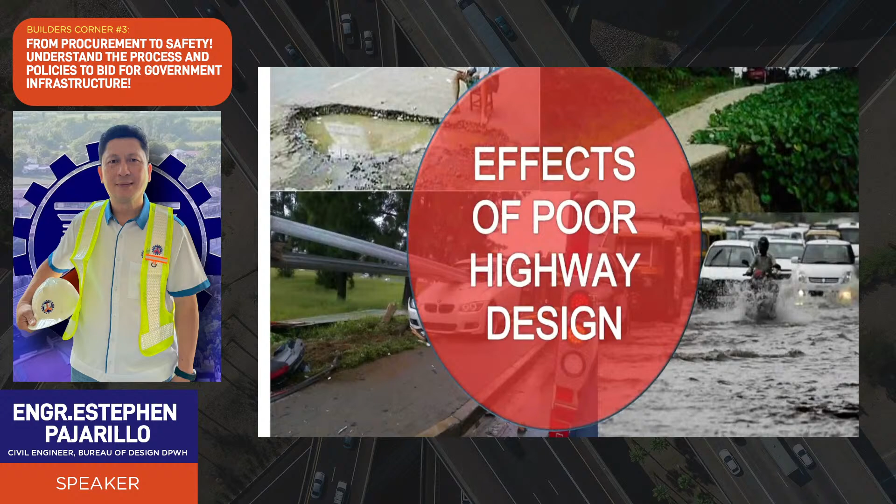These are the effects of poor highway design. When the highway design falls short, the consequences can be severe. Poor pavement design can lead to a shorter road life and increased maintenance costs. Inadequate slope protection can cause landslides or road collapse, especially in our country's varied terrains. Geometric design flaws might result in unsafe driving conditions, while subpar drainage design can lead to waterlogging and structural damage. These pitfalls underscore the need for rigorous design standards and practices.

These are the highway design standards. There are types of highway design standards. To mitigate these issues, we rely on established references and standards. The DPWH Design Guidelines, Criteria, and Standards from 2015 set the local framework. Internationally, we refer to AASHTO's Policy on Geometric Design and their Guide for Pavement Design. Additionally, the Highway Safety Design Standards provide critical directives on road safety and signage. Adhering to these guidelines is vital for constructing highways that are safe, reliable, and sustainable.

Moving on, let's break down the highway into its core components. The components form the building blocks of highway design, and each serves a specific function. Understanding the elements is crucial for grasping the holistic design process that goes into the highways we use every day.

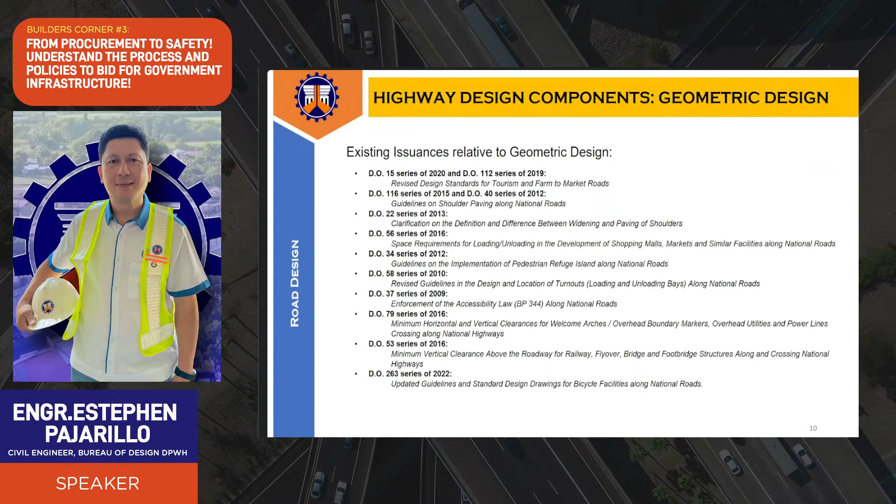Turnouts or loading and unloading bays are given updated guidelines in Department Order 58 series of 2010, reflecting the need for safer and more efficient roadside areas. The enforcement of the accessibility law along national roads is mandated by Department Order 37 series of 2009, ensuring that our roadways are inclusive and accessible to all.

Department Order 79 series of 2016 and Department Order 53 series of 2016 set the minimum clearance for various structures along national highways, from welcome arches to overhead utilities, ensuring the safe passage of vehicles. Lastly, the Department Order 263 series of 2022 updates the guidelines and standard design drawings for bicycle facilities, recognizing the growing need for sustainable and alternative transport options. These issuances reflect the DPWH's commitment to evolving and improving road design to meet the needs of the public and the environment.

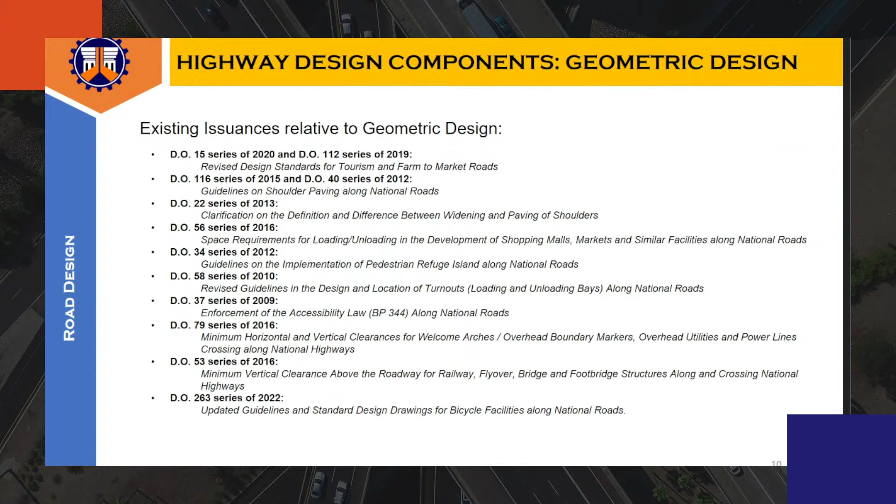The pavement design is a sophisticated process that requires precise calculation and consideration to ensure that the surface can withstand the expected traffic loads while providing a safe and comfortable driving experience. This process entails determining the appropriate thickness and strength of the pavement, whether it's asphalt or concrete, that will lie on the prepared soil foundation, known as the subgrade.

The design of asphalt thickness is guided by the AASHTO empirical equation, taking into account factors like the expected traffic load, measured in terms of equivalent single axle loads or W18, the reliability factor that accounts for variation in traffic prediction and material performance, and the serviceability index, which represents the level of comfort users experience when driving on the pavement.

Drainage coefficient and soil properties also play a crucial role. These ensure that the pavement can properly drain water and rest on a stable foundation, respectively. A structural number is an abstract figure representing the collective strength of the pavement layers, tailored to the environment it is built in.

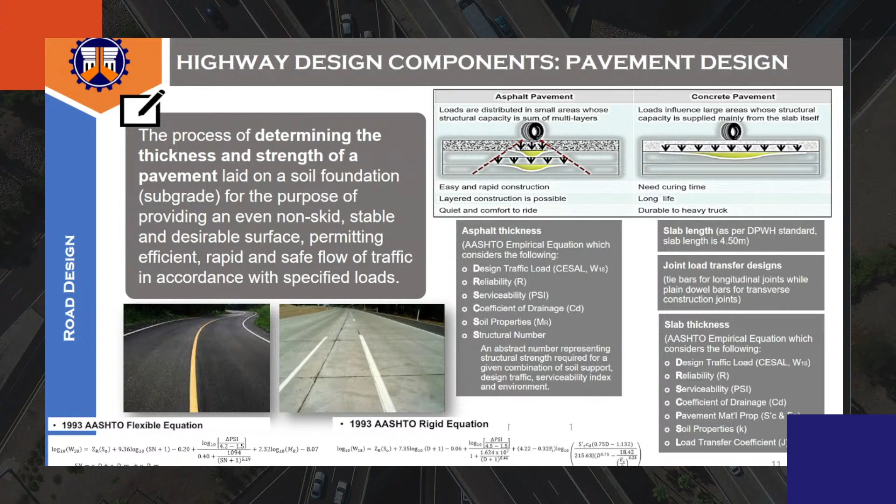The design and construction of pavement is governed by a set of guidelines and standards to ensure quality and consistency. The Department of Public Works and Highways has issued several directives in this regard. Department Order 32, Series of 2016, and the corresponding memorandum detail the guidelines for the use of dowel bars in Portland cement concrete pavements, an essential component for load transfer and preventing uneven settlement and cracking.

To set the benchmark for arterial and secondary national roads, including access to ports, we refer to Department Order 40, Series of 2014, and Department Order 22, Series of 2011. These orders prescribe the minimum design standard for Portland cement concrete pavement. Department Order 54, Series of 2012, provides guidelines on the reblocking of existing concrete pavements. This is a critical maintenance activity to restore the surface quality and prolong the pavement's life.

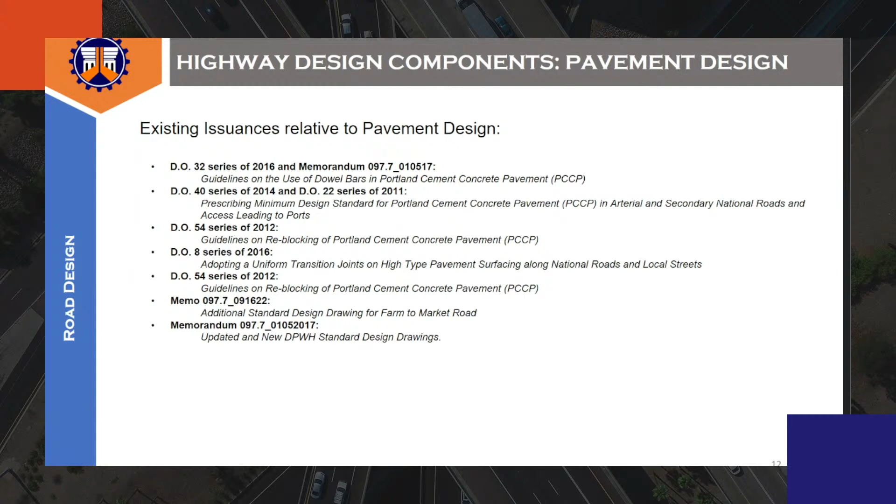An integral part of highway design is ensuring proper drainage. The primary objective is to maintain all parts of the highway in excellent drainage condition, preventing traffic congestion and accidents that can be caused by flooding water on the road surface. Hydrologic analysis begins with the determination of design runoff, for which we use the rational method. This method calculates the design discharge Q using the formula Q = 0.278 CIA, where A stands for drainage area in square kilometers, C is the runoff coefficient and I represents rainfall intensity. These factors together determine the volume of water that must be accounted for in the design.

Moving on, hydraulic analysis is about translating the hydrologic data into physical infrastructure. We take the calculated design discharge and consider the length, slope, and type of the culvert, as well as the allowable headwater depth. The material, cross-sectional shape, and entrance type of the culvert are also crucial inputs. From this, we can determine the size of the culvert required to ensure proper drainage. These steps ensure that the highway remains passable and safe under various weather conditions, protecting the investment in infrastructure and the safety of the public.

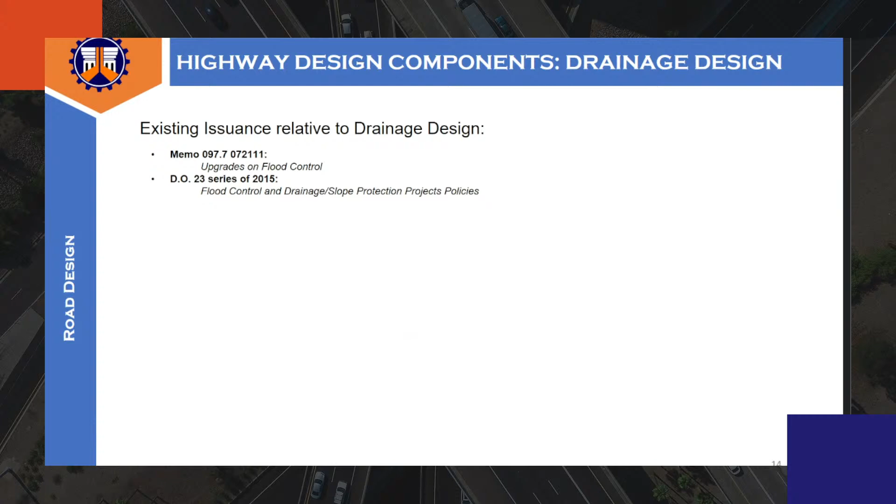Now, let's turn our attention to slope protection. Within highway design components, slope protection is crucial for the safety and longevity of highway infrastructure, particularly in regions with challenging topographies. The first step in designing effective slope protection is establishing rigorous design criteria and principles. Grounded in scientific engineering methodologies, it begins with identifying potential failure mechanisms that may affect the slope, which involves analyzing past records or experience in the area.

To ensure a stable slope, two criteria must be met: slope stability and slope protection. Stability involves ensuring that the slope can support itself and the loads imposed upon it without failing. Protection involves safeguarding the slope against surface erosion and weathering, which can weaken the structure over time.

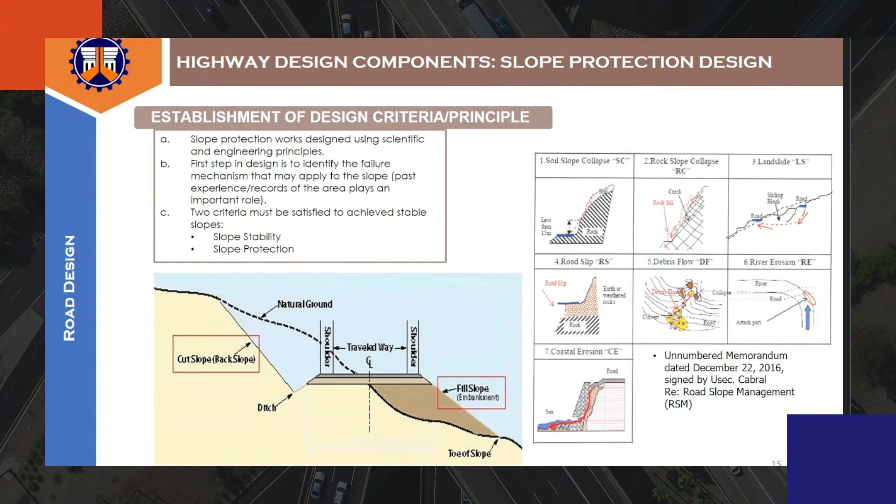An unnumbered memorandum dated December 22, 2016, signed by Undersecretary Cabral, particularly addressed road slope management. This memorandum provides guidance on maintaining and managing road slopes to prevent failures and ensure the safety of the traveling public. Effective slope protection design combines thorough assessment, proper material selection, and engineering practices to mitigate potential slope failures, such as soil slope collapse, rock fall, landslide, road slip, debris flow, river erosion, and coastal erosion, as illustrated in the image provided.

Continuing from our previous discussion of slope protection design, a pivotal aspect is the slope stability analysis. The analysis is performed to determine whether a man-made or natural slope or a slope protection structure can withstand potential sliding or collapsing.

To quantitatively assess slope stability, we introduce a factor of safety. This numerical value provides a measure of how safe the slope is from failure. The higher the FS is, the less likely the slope is to fail. For a slope to be considered stable, it must meet minimum FS criteria against different types of failure modes.

For overturning, the FS should be equal to or greater than 2.0. Against sliding, an FS of 1.5 or more is required. Regarding bearing capacity, which concerns the ability of the ground to support the loads, the FS should be 3.0 or above.

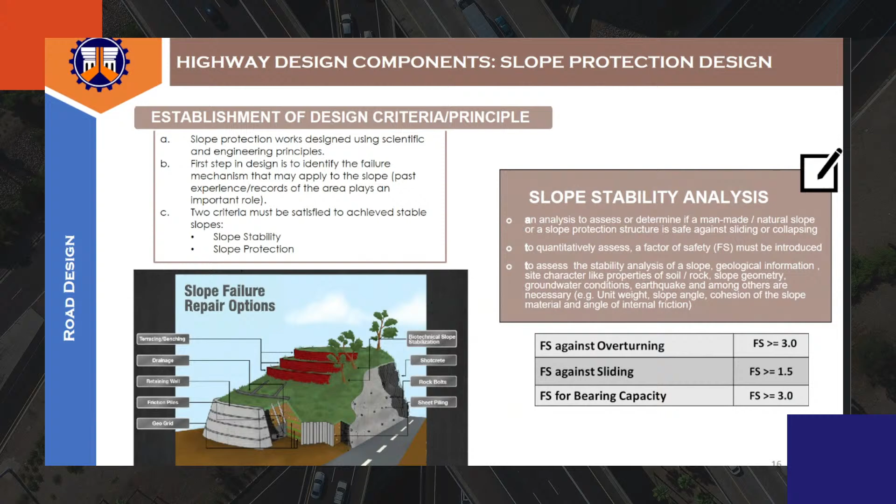This thorough analysis ensures that any slope along our highways can withstand the forces of nature and usage, thereby protecting the infrastructure and ensuring the safety of the public. The design and implementation of slope protection works are critical for the safety and maintenance of our highways. To guide these efforts, several issuances have been established.

The Department Order 68 series of 2012 provides guidelines on the design of slope protection works. This document outlines the standards and methodologies to be used in the stabilization of slopes adjacent to roads and highways, ensuring they are robust and resilient. Further support is found in Memorandum 097.7, which offers updated and new DPWH standard design drawings. These drawings serve as a blueprint for engineers and contractors, detailing technical specifications for various types of slope protection structures.

Recently, a series of department orders, including Department Order 78 of 2022, Department Order 22 of 2022, Department Order 32 of 2019, and Department Order 25 of 2023 have been issued concerning Item 522, which deals with active and passive systems for unstable slopes. These systems are designed to proactively prevent slope failure and reactively mitigate the impact should a failure occur.

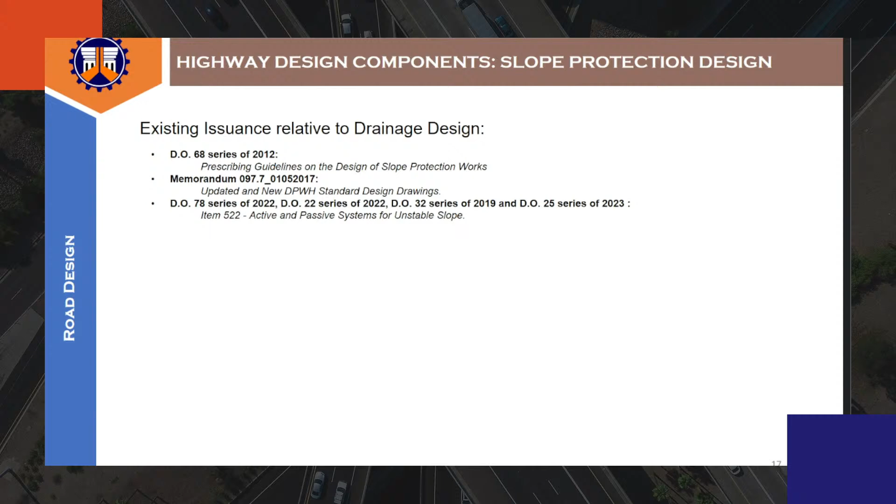Together, these form a comprehensive framework for the management and stabilization of slopes, ensuring the integrity of our road network and the safety of its users. Thank you.

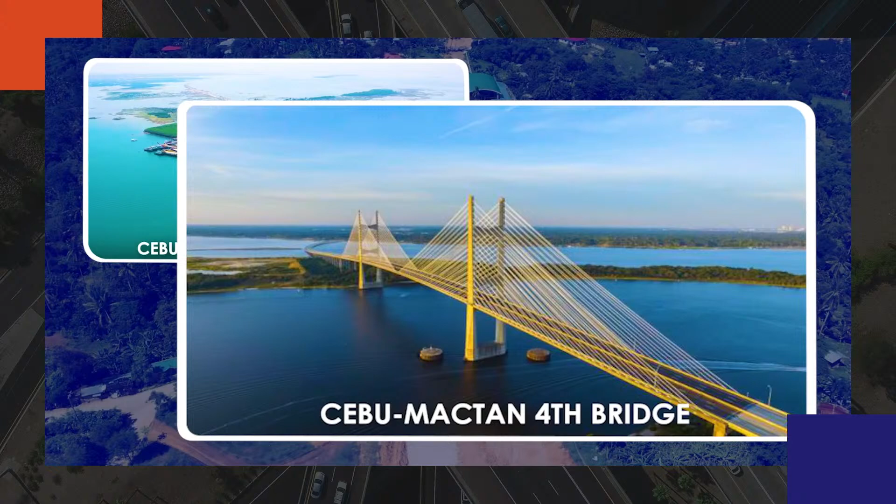Spanning 56.3 kilometers, the Metro Cebu Expressway connects Naga City to Danao City. It consists of 20 bridges, 16 tunnels, and 5 interchanges, traversing along the slopes of the mountain range of Cebu Province, providing a scenic sense while on the road. Once open to traffic, travel time from Naga City to Danao City will be reduced from 3 hours to only 1 hour and 30 minutes, providing transport mobility across urban districts that contributes to redirecting urban land use, demographic, and economic expansion. The project, complementing other development projects such as the ongoing Cebu-Cordova Link Expressway and the planned Cebu-Mactan 4th Bridge, can also provide better accessibility to Cebu's tourist destinations. Metro Cebu Expressway, truly a game changer.

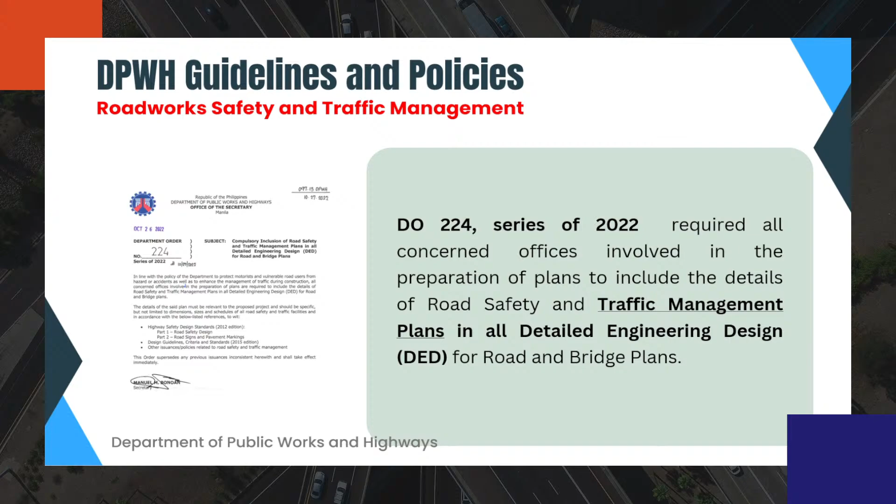Now, although yung policy natin started or was issued last 2022, way back during the 1970s pa po, meron na tayong mga requirements when it comes to roadwork safety. Now, highlight ko lang po that the DPWH requires through the issuance of the DO 224 series of 2022 na lahat po ng implementing offices namin that are involved in the preparation of the plans will include details of road safety and traffic management plans in all our detailed engineering design plans.

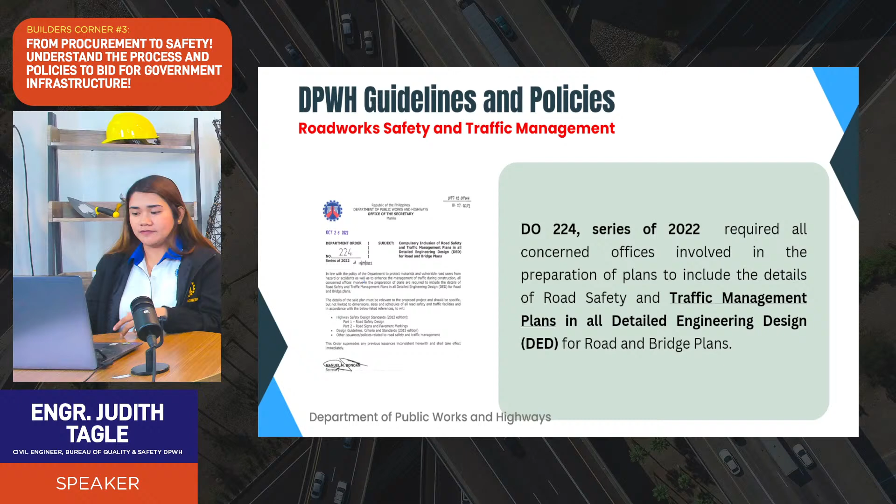So, ibig sabihin po, lahat ng mga DED plans natin, particularly the road and bridges na mga projects po natin, will have a component when it comes to traffic management and roadwork safety. We call that the traffic management plan. So to give you an overview, the traffic management plan is a plan that is being prepared kasama po ng detailed engineering design plan natin.

So in advance of the project implementation. So, during the planning and designing stage, kasama na po siya sa pine-prepare. Now, for now, ang nagpe-prepare nito is si DPWH Implementing Office, and the traffic management plan will form part of the detailed engineering design plan of the project.

Which will be used during the procurement na po. So it covers the design, the implementation, as well as the maintenance during nung ating project implementation to ensure roadworks safety.

Now, in the DPWH, we have our primary or official source or reference for the preparation of traffic management plan. So we have the DPWH Roadworks Safety Manual. Ang current natin ngayon is the 2004 edition, but this year we will be releasing the revised or the updated DPWH Roadworks Safety Manual.

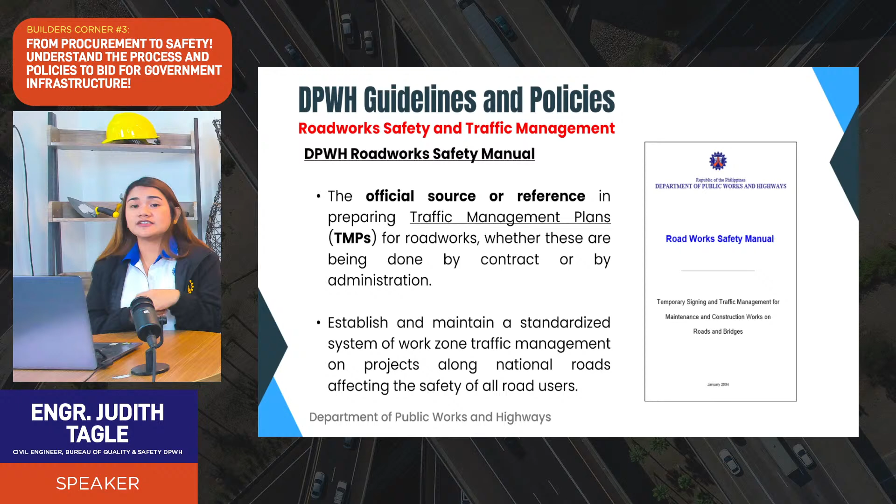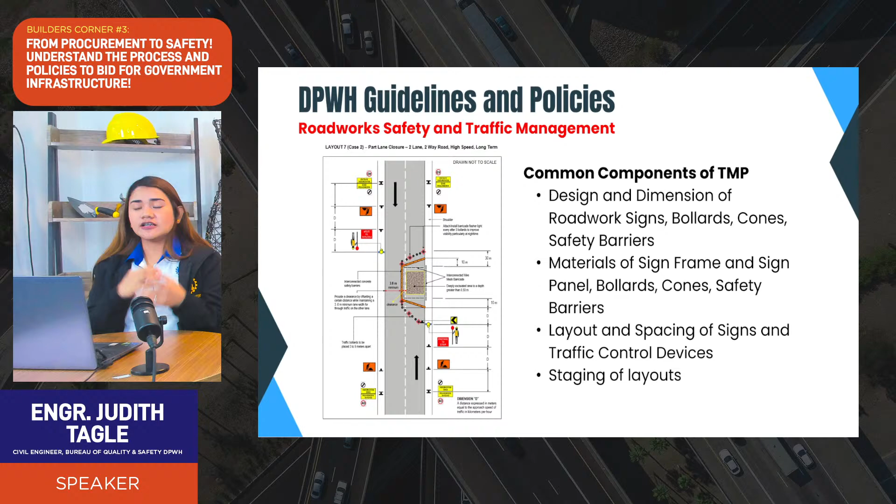Now, dito rin sa TMP, kasama kung ano yung particular na requirement ng DPWH when it comes to the sign, the frame, and as well as the materials for the bollards, the cones, and the safety barriers. Dito rin makikita natin how these signs and traffic control devices will be laid out on site. So sample natin dito sa left side. This is a typical layout of the different traffic control signs and devices na ginagamit po natin sa DPWH.

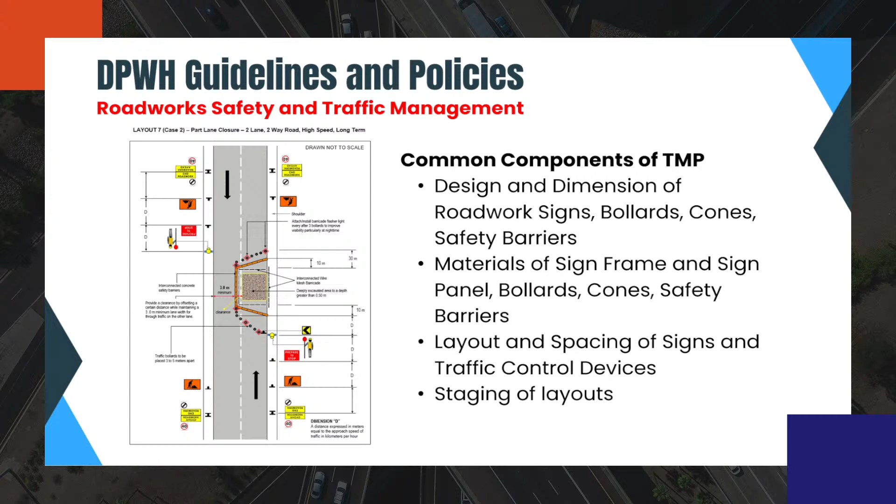So, nakalagay din po dyan what are the required spacing. So, it can be varying depending on the project. So, mag-iiba-iba yung mga spacing natin. So, all of this are included in the TMP or the traffic management plan. So, pwede rin na yung TMP will have different layouts. So, it will depend on the construction methodology and the staging of the project natin, particularly for roads and bridges.

Now, to highlight, kasi sabi natin kanina, we are standardizing our requirements, particularly for the roadwork signs and the traffic control devices na ginagamit natin or dapat na gamitin sa mga DPWH projects natin. So here we are highlighting the typical roadwork signs na dapat na ilalagay or makikita natin sa mga DPWH projects. So we are hoping na some of this talagang nakikita nyo na. Particularly kasi yung color ng roadwork signs natin, yung background niya is yellow. So internationally, we use the yellow background ng mga signs natin to indicate na meron tayong ongoing or temporary roadworks or road construction.

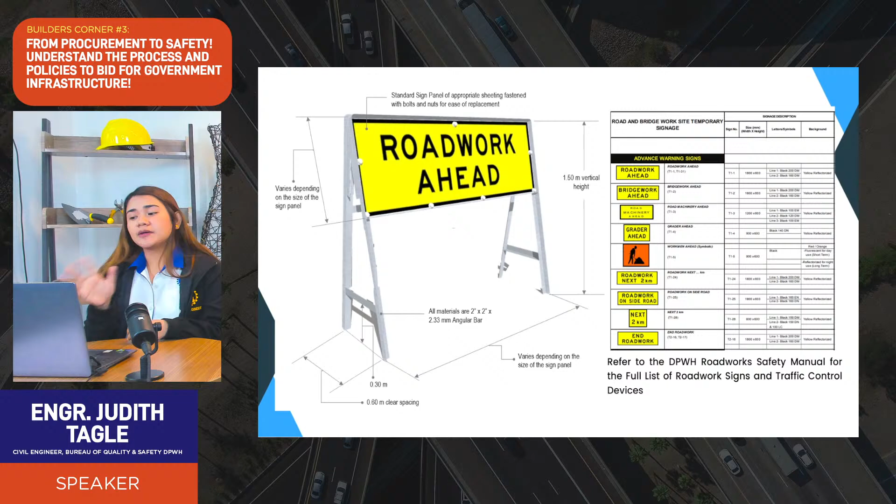Now, pinapakita lang din natin dito what are our requirements when it comes to the sign panel, the dimension as well as the sign frame. Now, on the right side, you will be seeing the different types of signs na meron po tayo doon sa ating manual. Now, these are just some of the signs, marami po yan. So, we just have to refer to the DPWH Roadworks Safety Manual for the full list. Now, etong mga signs po na to, when the TMP is being prepared, kasama na po siya sa Detailed Engineering Design Plan.

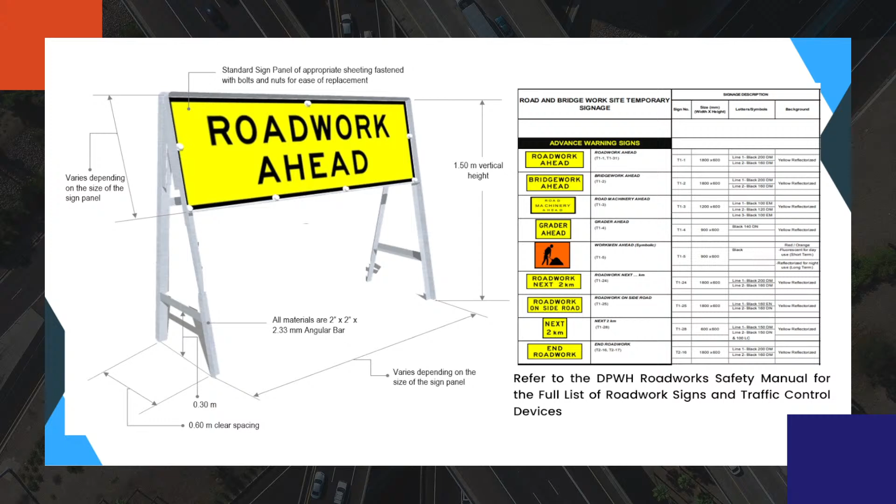Is the requirement when it comes to the sign itself. Now, we are requiring na yung sign panel is made of retroreflective material. So, it is a mandatory requirement for roadwork signs. We are requiring yung ganitong retroreflective material sa mga signs natin because ito yung nag-enable sa lahat ng mga signs natin na makita ng mga road users, ng mga drivers at night.

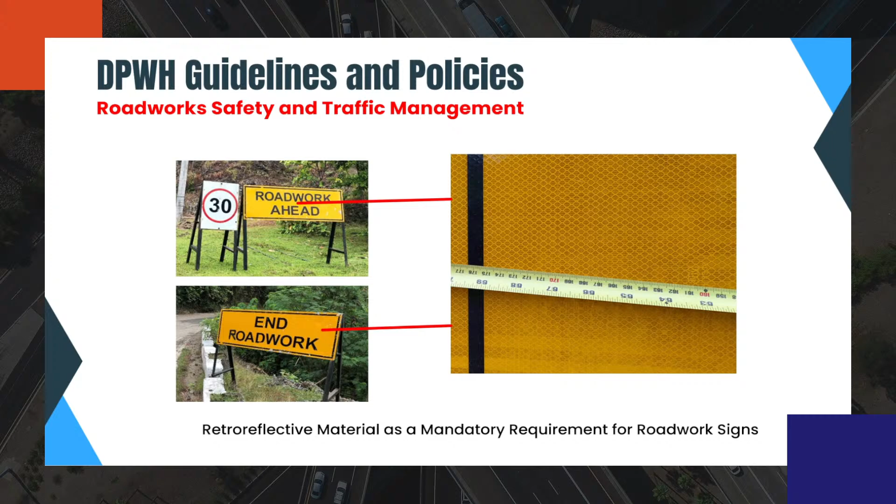So, yung mechanism ng mga signs natin para makita sila at night, na yun yung pinakamahalagang time na nabibigay nung sign yung gamit niya as advanced information dun sa presence nung ongoing project natin, this is through the retroreflective material of the sign itself.

Okay. So, these are also naman our requirement in terms of the traffic control devices. So, our common traffic control devices na we use sa mga projects natin is yung ating temporary bollards, as well as our traffic cones. So, ang main use nila is for delineation. So, ang pinaka-importanteng part will be the retroreflective strips. Yan. So, makikita natin yung mga white na strips dito sa ating screen.

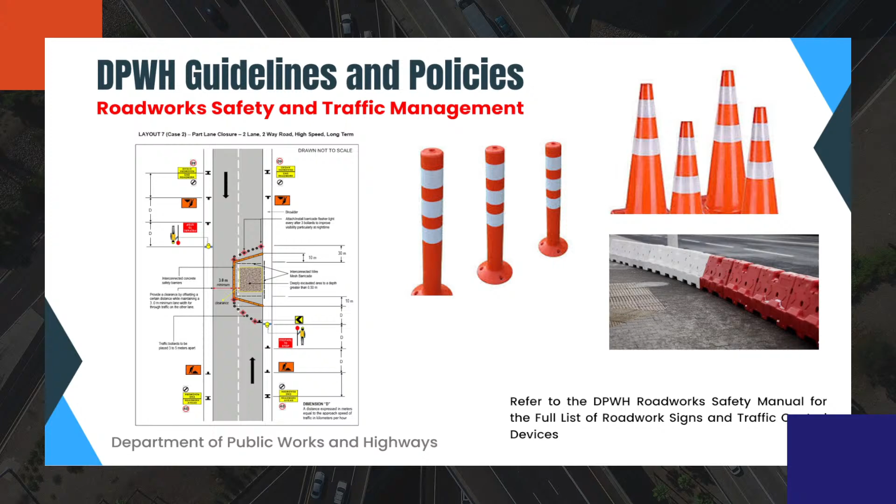So, just like our traffic control signs and roadwork signs earlier, these white reflective strips enable road users to see the alignment of our ongoing project, delineating the project so drivers, especially at night, can see how far the part of the road with the project extends. We also use safety barriers to fully enclose our sites.

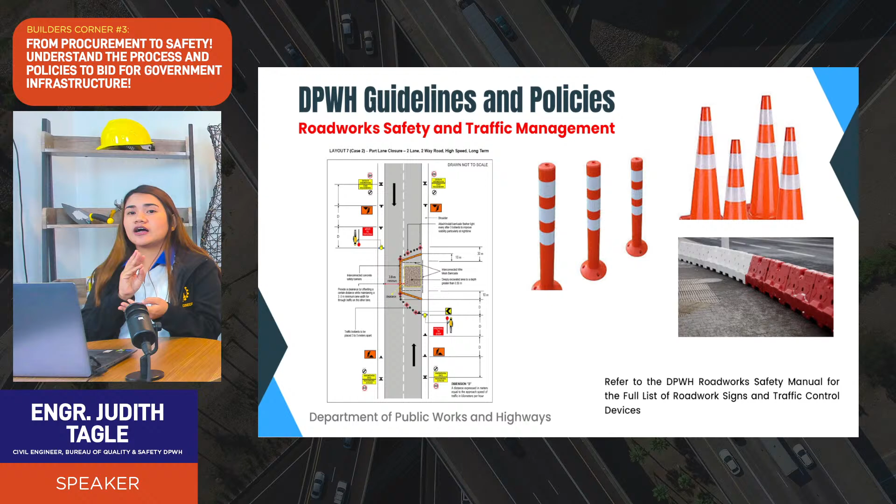These prevent our drivers, in the event of a crash, from entering where work is being done. Now, DO13 of the DPWH series of 2018 requires it to be included in the contract. Since it's in the plan, the roadwork safety and traffic management plan is part of the DED. In terms of the pay item in the contract, it is tagged under item B.8.

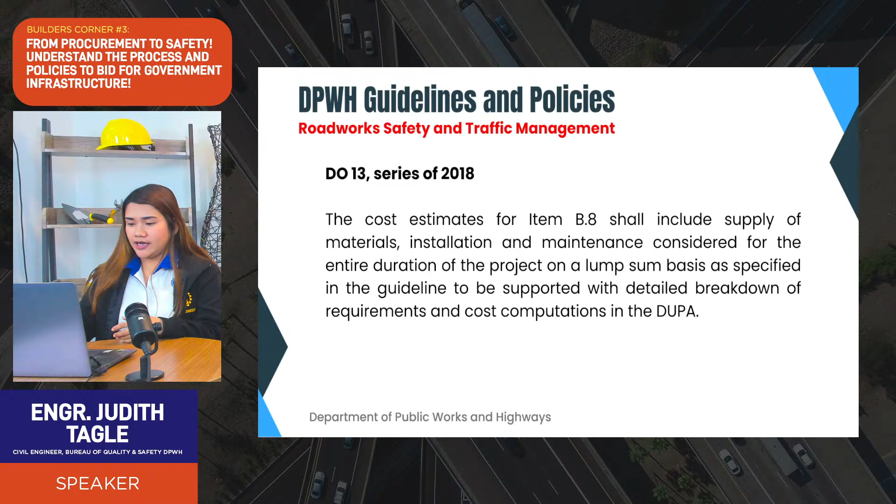If you're familiar with the DPWH pay items, item B.8 includes the supply of materials, the installation, as well as the maintenance during the entire duration of the project. The TMP lists our requirements, and its cost will be paid under item B.8. These are the procedures on how we derive the cost for item B.8. We highlight that item B.8 is on a lump sum basis.

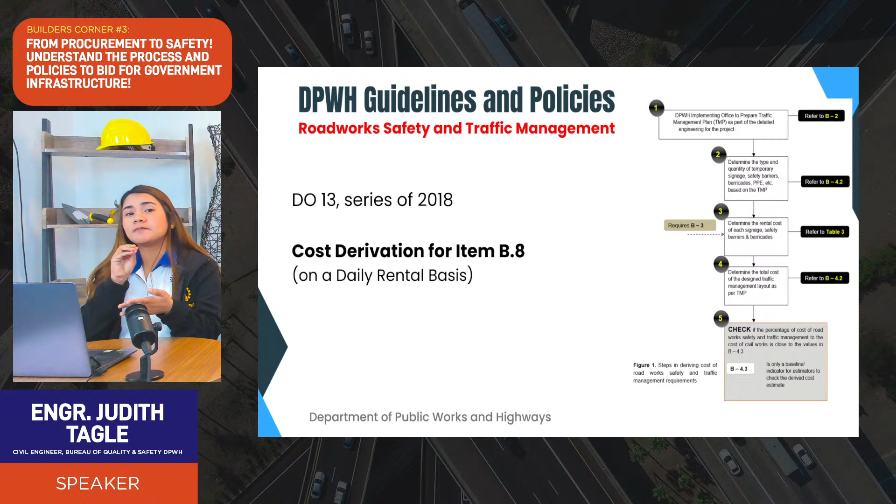When we say rental, the contractor doesn't need to hand over the signs and traffic control devices to DPWH. DPWH only rents them from the contractor, who still owns all the signs and traffic control devices. What we highlight here is that, as required by DO13, the derivation of cost for item B.8 in the contract will come from the approved traffic management plan.

Now, from pre-procurement to construction, these are the requirements. I've already discussed the pre-procurement requirement, the TMP prepared as part of the DED plan through DO 224. During procurement, based on the approved TMP, the contractor submits a bid for item B.8. This forms part of the bid and eventually the contract for the winning bidder, under DO13 series of 2018.

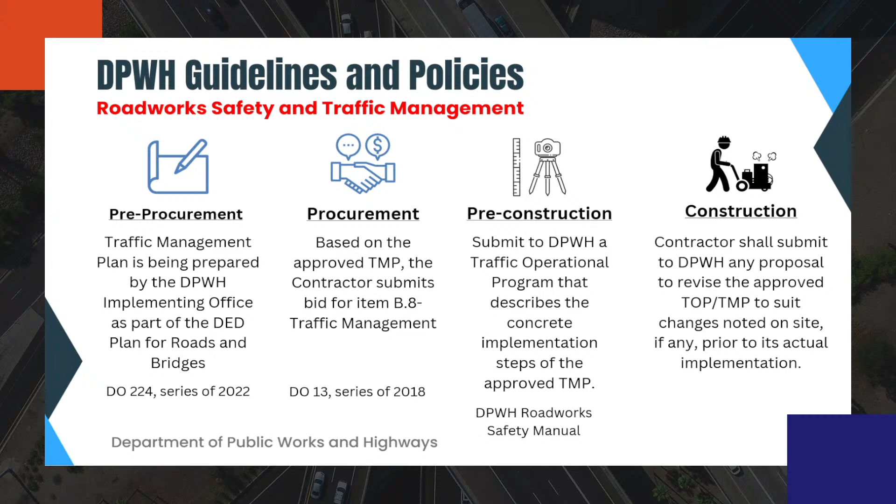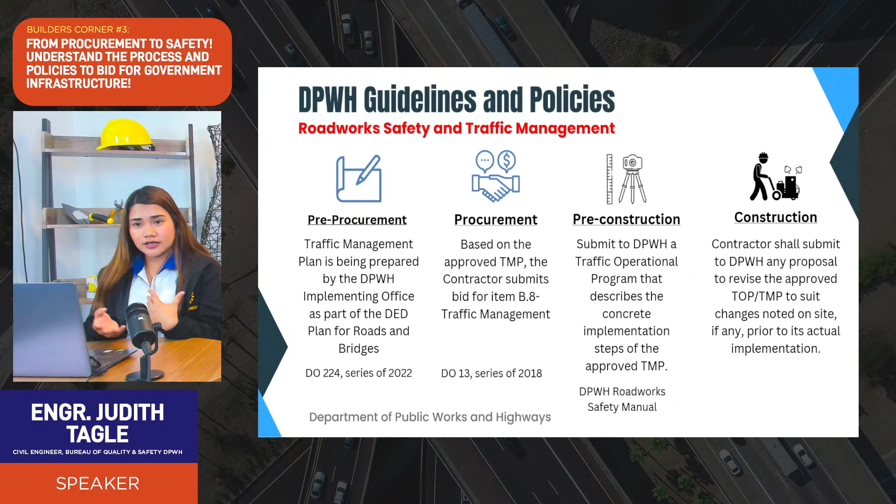During pre-construction, the contractor is required to submit. There will be instances where the prepared TMP is not the same TMP implemented by the contractor, so the contractor may submit their own TMP, called the Traffic Operational Program. It describes the concrete implementation steps of the approved TMP. Any revisions to the TMP by the contractor undergo review and approval by the DPWH Implementing Office.

During implementation, the TMP is part of the DED and of the contract under item B.8. Since it's part of the contract, the contractor must implement what is in the approved TMP or Traffic Operational Program. On our part, the DPWH field engineers, project engineers and inspectors, and the assigned implementing office will ensure the contractor is complying, as well as with the contract agreement or item B.8.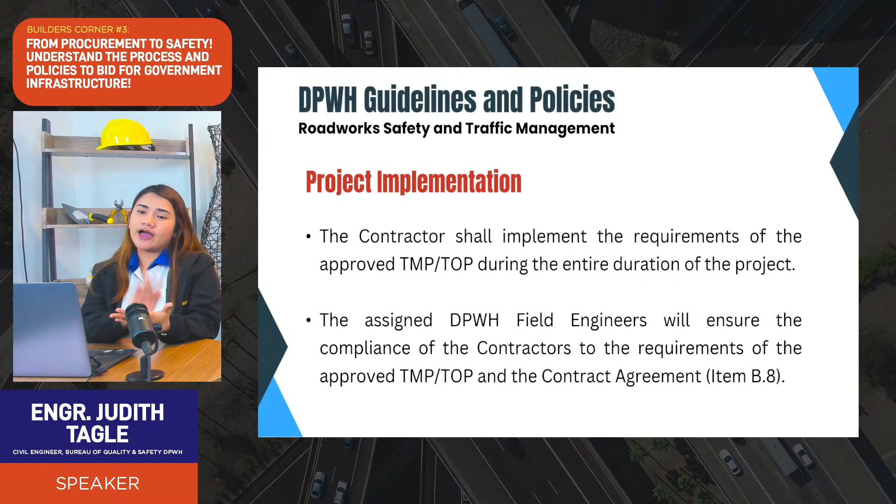So the highlight here is that, as a main document implemented during construction, we have the traffic management plan, and it is part of the contract under item B.8. The contractor will have to implement the requirements of the TMP and the contract to ensure a safe experience for our road users.

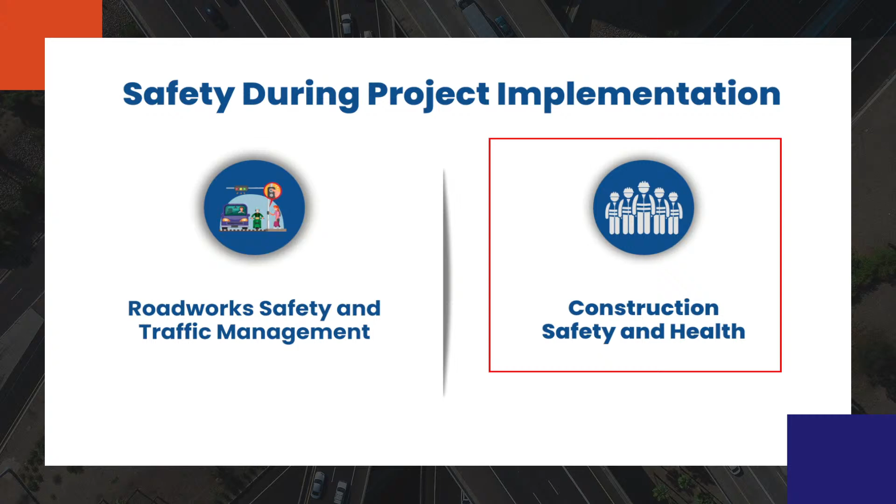The second safety aspect we look at during project implementation is construction safety and health. This is the mother safety policy of the department, from which roadwork safety and traffic management emanated. It is a requirement of the labor code, whose main focus is the safety of the workers doing the work. Under DPWH DO 56 series of 2005, all minimum construction safety and health requirements must be prepared during the detailed engineering stage.

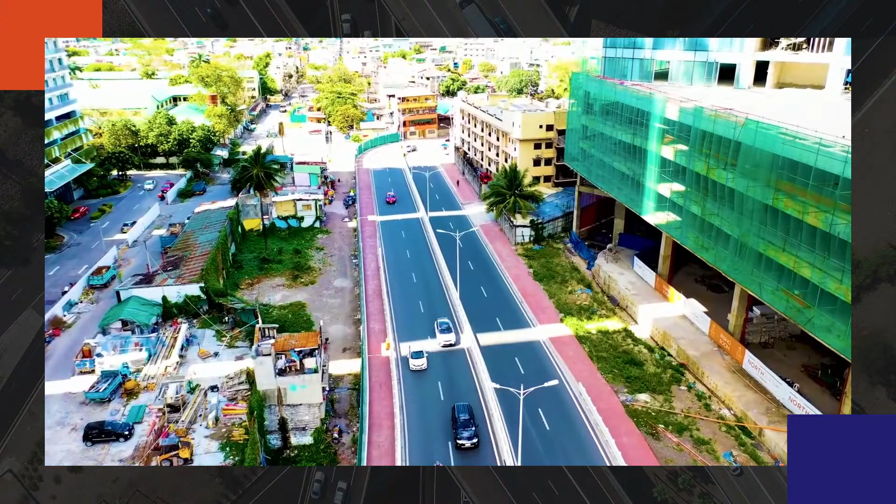For me, the bridge is great, beautiful, and it's easy, more easy access to go to Rockwell, like for grocery shopping or others. So whereas we benefit, and I love it, we could even benefit even more.

Located in central Visayas, the heart of the Philippines with fast-growing economy. More exemplary improvements await the historic province of Cebu with the Metro Cebu Expressway. With its construction started in July of 2018, the Metro Cebu Expressway is designed to improve and enhance Cebu's transport demand. With the project's third segment in the works, made possible through a startup fund approved for the DPWH Region 7, the expressway is expected to act as a north to south backbone highway, allowing a much-needed seamless flow of traffic that will significantly address the congestion in Cebu.

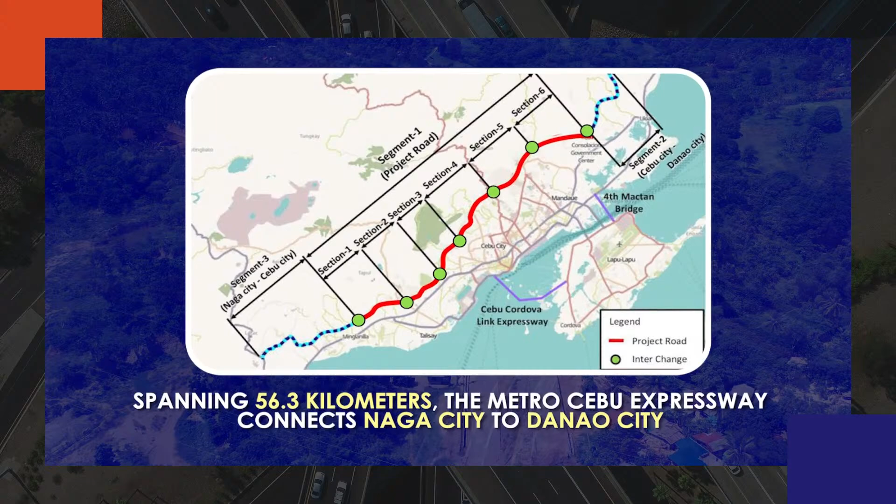Spanning 56.3 kilometers, the Metro Cebu Expressway connects Naga City to Danao City. It consists of 20 bridges, 16 tunnels, and 5 interchanges, traversing along the slopes of the mountain range of Cebu Province, providing a scenic sense while on the road. Once open to traffic, travel time from Naga City to Danao City will be reduced from 3 hours to only 1 hour and 30 minutes, providing transport mobility across urban districts that contribute in redirecting urban land use,

demographic, and economic expansion. The project, complementing other development projects in the pipeline, such as the ongoing Cebu-Cordova Link Expressway and the planned Cebu-Mactan 4th Bridge, can also provide better accessibility to Cebu's tourist destinations. Metro Cebu Expressway, truly a game changer.

Corner number 3, from procurement to safety. So understanding the process and policies to bid for government infrastructure.

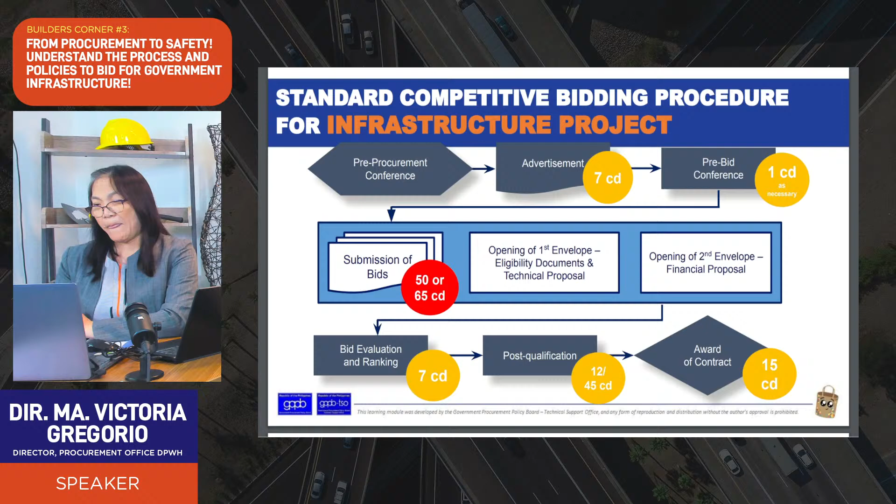So this is the recommended possible period to complete the procurement activity for infrastructure projects. Makikita po natin ito sa Annex C ng ating IRR of RA 9184. The earliest period is 26 calendar days. Then the maximum period po is 141 if the ABC is 50 million and below, and 156 calendar days if the ABC is more than 50 million. It excludes approval of the higher authority.

Pre-procurement conference. Okay, it should be conducted prior to the advertisement of invitation to bid. It is mandatory for infra with an amount of 50 million and above. Okay? Then, sino-sino po ba yung mga participants? The BAC secretariat, TWG, consultants, end user, and other officials. Bakit wala po yung observers? Because it is only a determination of the readiness of the procurement activity. Hindi pa po ito yung competitive bidding. Standard procedure pa lang po ito. Okay?

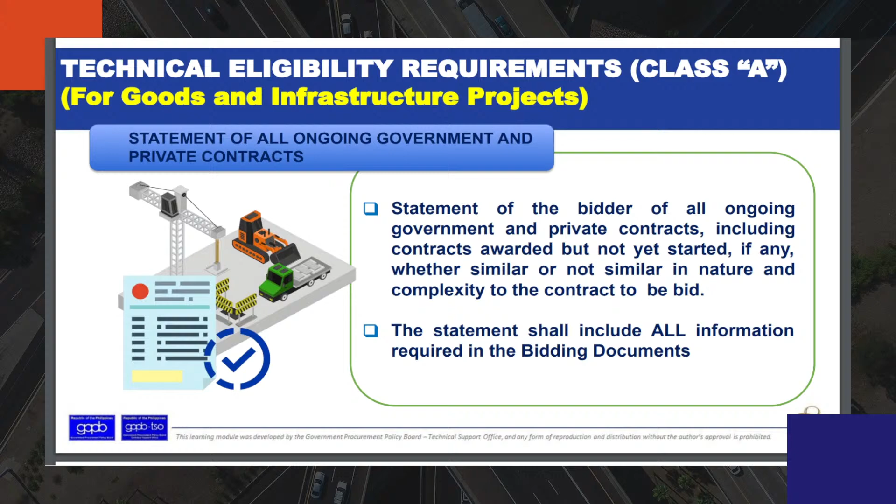Then, statement of all ongoing government and private contracts. Okay, statement of the bidder of all ongoing government and private contracts, including contracts awarded but not yet started, if any, whether similar or not similar in nature and complexity to the contract to be bid. The statements shall include all information required in the bidding document. Bakit po kailangan ito i-submit? Because ito po ay dinededuct sa inyong net financial contracting capacity. Failure of the contractor to disclose the statement of all ongoing government and private contracts is a ground for disqualification. Okay?

So, statement of single largest completed contract or SLCC. It should be similar to the contract to be bid or has the same major categories of work. If you intend to participate in the DPWH procurement of infrastructure projects, meron po kaming Department Order Number 117 Series of 2017 entitled Determination of Major Categories of Works. Okay? Makikita nyo po doon, pagka po kunyari drainage, meron pong corresponding similar works po yon. Doon nyo po ma-assess kung kayo ba ay qualified or hindi.

Then the SLCC value should be at least 50% of the ABC to be bid upon adjustment to current prices using the PSA Consumer Price Indices. So doon naman po sa mga bagong contractor: contractors under small A and small B categories without similar experience on the contract may participate if the cost of the contract to be bid is not more than the allowable range of contract costs of their registration.

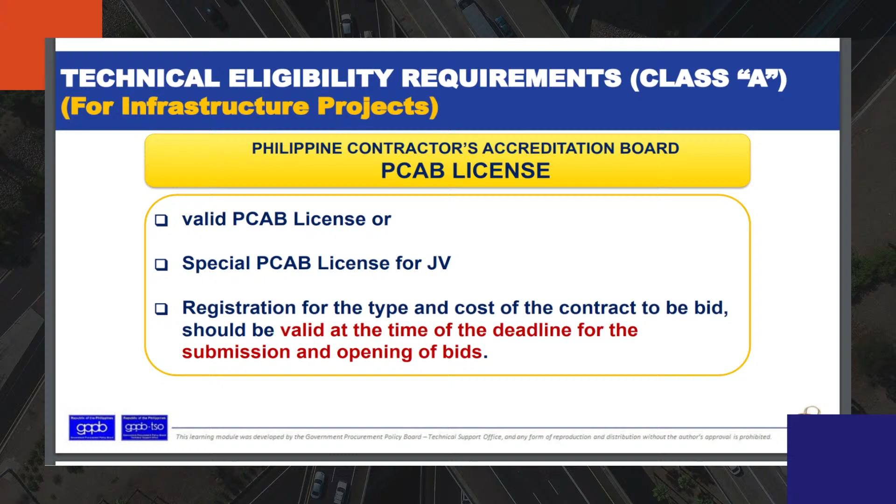It should be valid at the time of submission of bids. Dapat po both are valid at the time of submission of bids. So sinasabi lang po dito yung non-acceptability of temporary PCAB license. Si PCAB po kasi nag-i-issue rin siya ng temporary PCAB license. Kasi po, most of the time po tayong mga Pilipino kung kailan deadline, tsaka po tayo nagre-renew. So, hindi na po makaya ni PCAB. Nag-i-issue po siya ng temporary PCAB license.

However, if you intend to participate in the government procurement, it is not acceptable. Hindi po yan acceptable. Baka po doon sa private, pwede, but not in the government procurement under GPPB Resolution number 10, 2019.

Okay, yun naman po financial eligibility requirement natin, yung audited financial statement showing among others the total and current assets and liabilities. It should be stamped received by the BIR or its duly accredited and authorized institution. The audited financial statement should not be earlier than 2 years from the date of submission of bids. Okay.

Then, ito naman po, pinakikita po dito yung computation ng ating NFCC. NFCC should at least be equal or more than the ABC. Ano po ba yung computation? Current assets minus the current liabilities times the K factor of 15. Regardless po yan of duration. Nakafix na po yung 15. Minus the value of all ongoing or outstanding or uncompleted portion of the projects under ongoing contracts, including awarded contracts yet to be started coinciding with the contract to be bid. Okay?

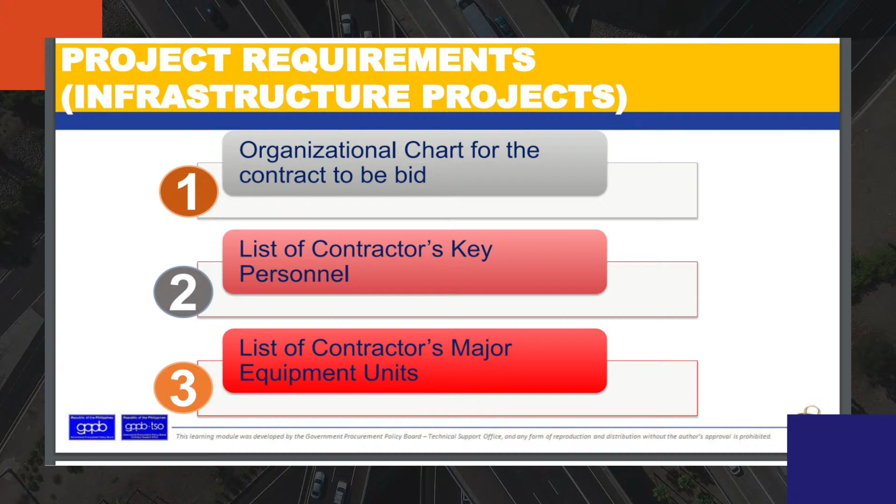Okay. I-inform ko na po kayo, baka hindi pa po kayo aware, most of the time po kasi ito po yung nare-receive namin na unlocking at saka motion for reconsideration, yung GPPB Resolution number 15, 2021. Meron po bagong format doon. Then, meron po sinasabi doon, yung mga legal documents, mayor's permit, tax clearance, NFCC, SEC, DTI, any of the 5 documents na expired during the time of submission of bid, though the PhilGEPS Certificate of Platinum Membership is valid, suspended po yung validity ng PhilGEPS Certificate of Platinum Membership.

Ma'am, nag-submit naman po ako sa technical envelope. Hindi po yun acceptable. Yung mga updated documents should be uploaded sa PhilGEPS, hindi po sa technical envelope. So, ano naman po yung mga project requirements sa infra? Nandiyan po yung organizational chart for the contract to be bid, the list of contractor's key personnel, and then the list of contractor's major equipment.

So, required din po kayong mag-submit ng bid security. Ano po ba yung purpose nito? To guarantee po that the successful bidder should enter into a contract within the prescribed period and then magpo-post po kayo ng performance security. Ano-ano po ba yung mga acceptable form? It can be in the form of cash, cashier's or manager's check, bank guarantee, or irrevocable letter of credit issued by universal or commercial bank, 2% of the ABC. It can also be in the form of bid securing declaration and surety bond, with a premium of not less than 5% of the ABC.

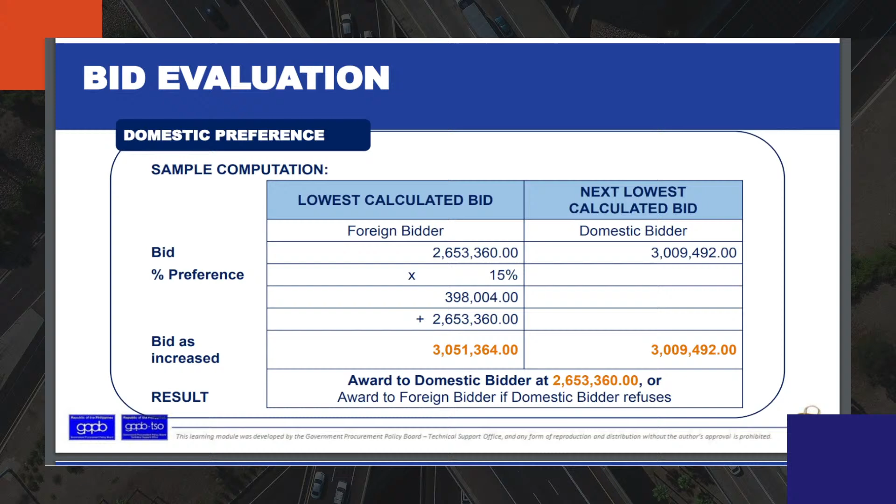Then the lowest calculated bidder will be subjected to post-qualification. Ano po ba yung post-qualification? Ito po yung mga verification, validation, and ascertainment of all documents submitted by the bidder. It should be completed in 12 calendar days, but not more than 45 calendar days po upon approval of the head of the procuring entity.

Okay? So, sinasabi lang po dito, yung lowest calculated bidder, if he was found to be post-disqualified, another 12 calendar days na naman po doon sa second lowest bidder, until such time po na makakuha ka ng lowest calculated and responsive bidder. So sinabi po natin kanina, PhilGEPS registration lang. So dito po sa post-qual, dito na po natin hihingin yung mga mayor's permit, tax clearance, and so on, yung 5 documents. Then i-verify po natin yan para ma-declare natin na responsive si bidder.

Then award of contract. So sinasabi po sa ating IRR, the BAC shall recommend award of contract to the lowest calculated responsive bid or highest rated responsive bid or single rated responsive bidder at submitted bid price or calculated price, whichever is lower. Then the BAC shall notify all other bidders in writing of the recommendation to the HOPE of award of contract to LCRB within 3 calendar days from the issuance of resolution recommending award. The HOPE shall approve or disapprove the resolution of the BAC within 15 calendar days.

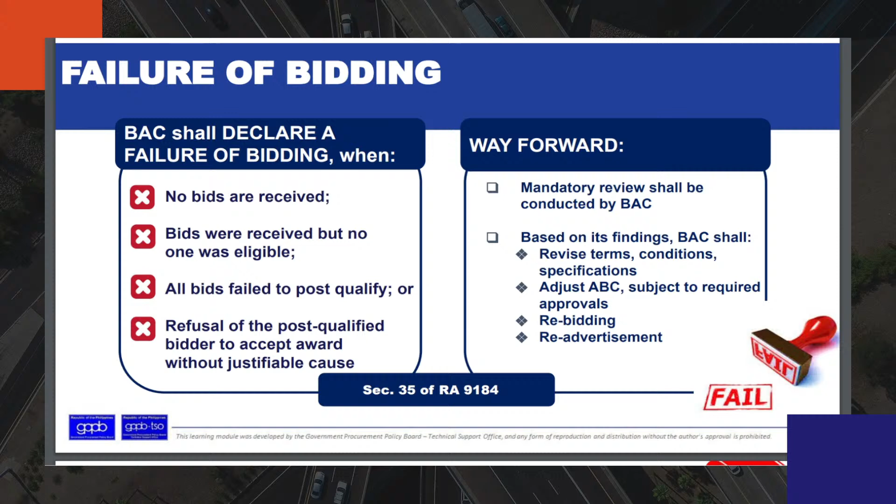Ano po yung gagawin ni BAC? Dapat po, mandatory review shall be conducted by the BAC. Then based on the finding, the BAC shall revise the terms, conditions, and specs, adjust the ABC subject to the required approval, conduct rebidding, and re-advertisement. Nakikita nyo po yan sa Section 35 ng ating IRR of RA 9184.

Okay, so that's the end of my presentation. So thank you very much.

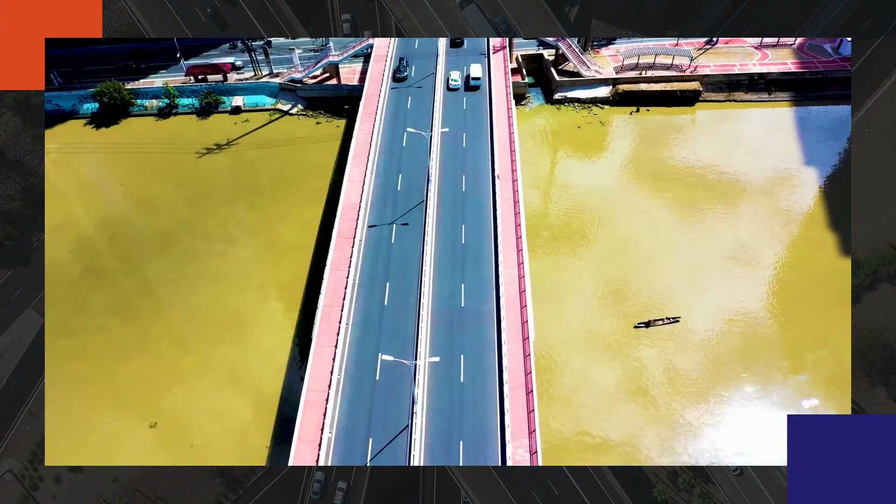For me, the bridge is great, beautiful, and it's easy, more easy access to go to Rockwell, like for grocery shopping or other. So whereas we benefit, and I love it, we could even benefit even more.

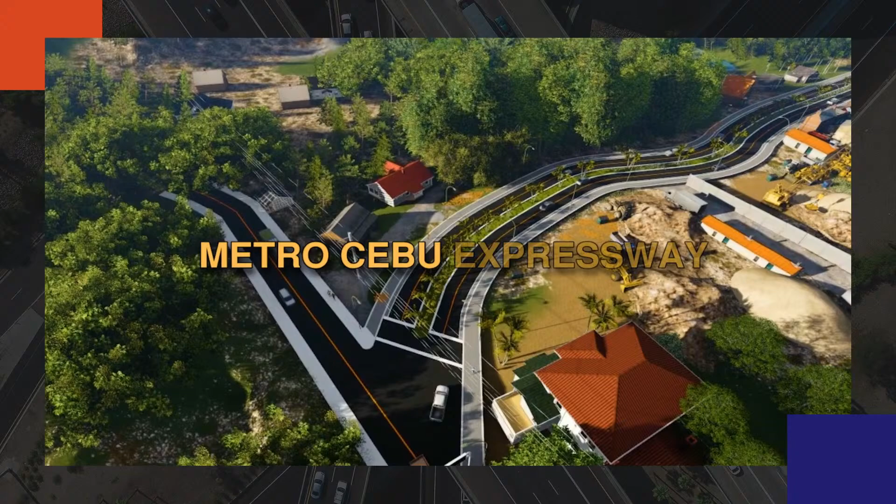Located in Central Visayas, the heart of the Philippines with a fast-growing economy. More exemplary improvements await the historic province of Cebu with the Metro Cebu Expressway. With its construction started in July of 2018, the Metro Cebu Expressway is designed to improve and enhance Cebu's transport

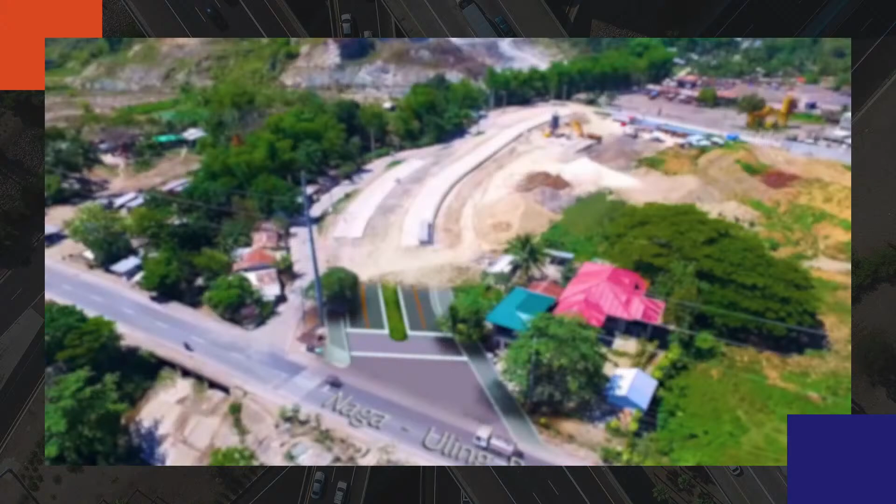demand. With the project's third segment in the works, made possible through a startup fund approved for the DPWH Region 7, the expressway is expected to act as a north to south backbone highway, allowing a much-needed seamless flow of traffic that will significantly address the congestion in Cebu.

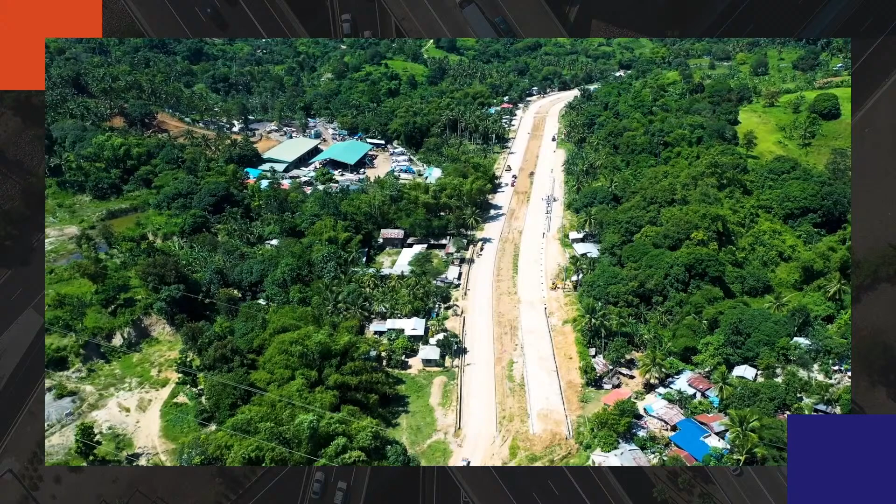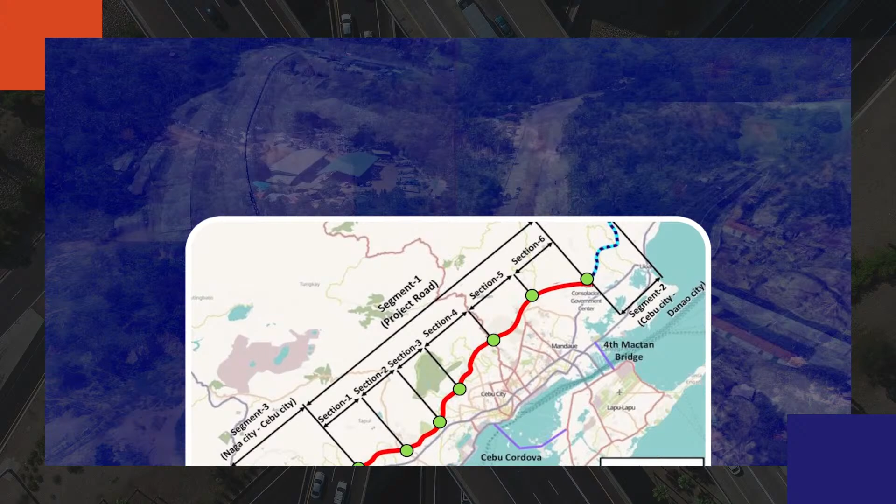Spanning 56.3 kilometers, the Metro Cebu Expressway connects Naga City to Danao City. It consists of 20 bridges, 16 tunnels, and 5 interchanges, traversing along the slopes of the mountain range of Cebu Province, providing a scenic sense while on the road.

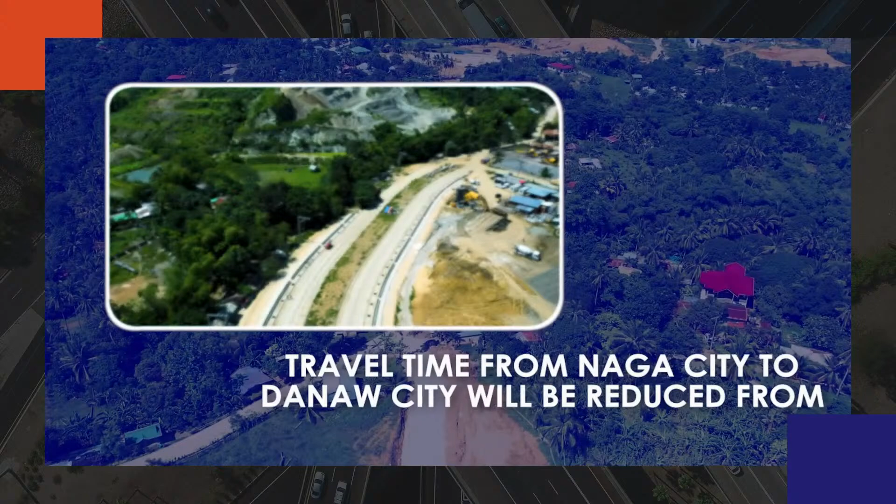Once open to traffic, travel time from Naga City to Danao City will be reduced from 3 hours to only 1 hour and 30 minutes, providing transport mobility across urban districts that contribute in redirecting urban land use, demographic, and

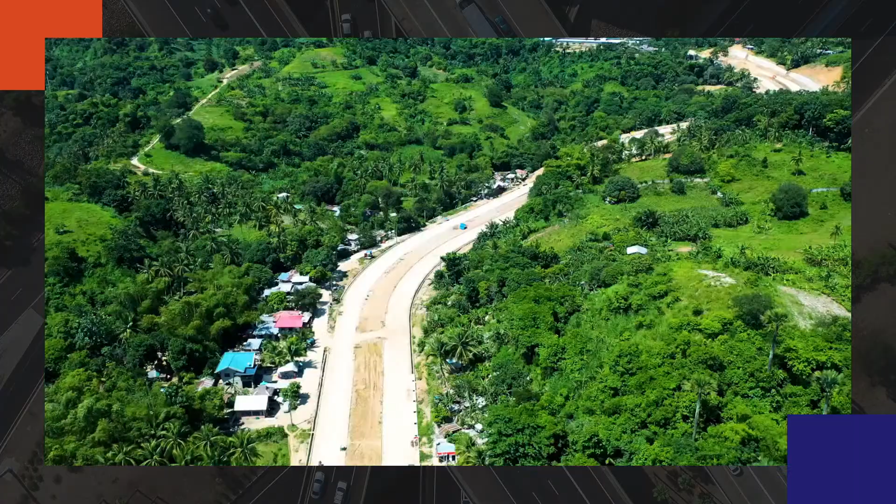economic expansion. The project, complementing other development projects in the pipeline, such as the ongoing Cebu-Cordova Link Expressway and the planned Cebu-Mactan Fourth Bridge, can also provide better accessibility to Cebu's tourist destinations. Metro Cebu Expressway, truly a game changer.

Heading to the upland city of Baguio, one often opts for the fastest route through Kennon Road. Built in 1905, the century-old road begot the historic